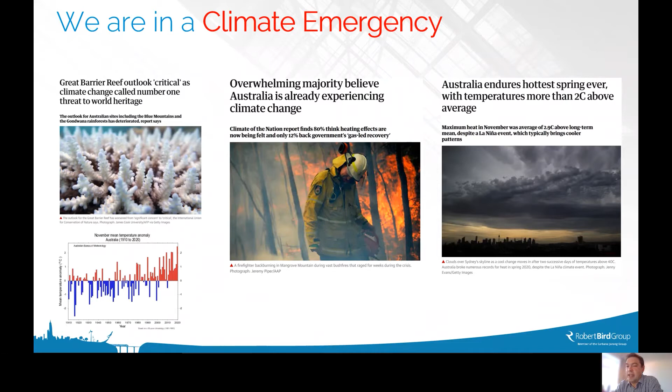So it is a very serious topic for us globally as a population, and this is coming on - global leaders are meeting at the moment to talk more about climate change. So it's obviously very relevant worldwide. The last 4 years have been the hottest on record, and I think the UN Secretary General put it: we're currently losing the race against climate change.

But it is one that we can turn around. There's a lot of discussion where the younger generations and our children are challenging us, putting the current working population on the spot to solve this, because unless we make significant inroads into solving the problems, it's too late for them to solve it. So it's not something we can leave for them to deal with - we have to act now, really.

So what impact do we have on it? We all work in the built environment, so where do we come in the overall context of climate change? The World Green Building Council has a strategy document, and some key points they pull out are: buildings are responsible for around 40% of energy-related global carbon emissions, and also 50% of global material use. And that's only going to go up in terms of the quantities needed.

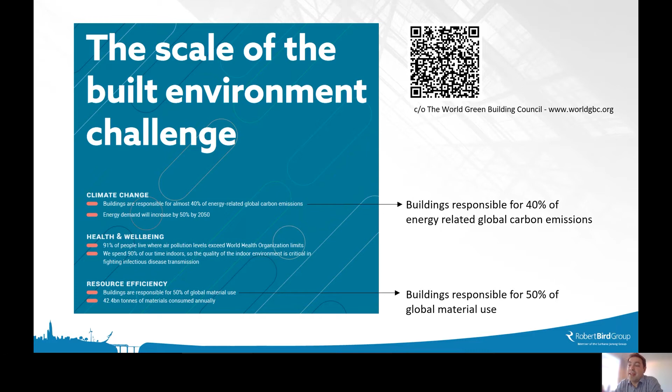The global population is growing - I think it's going to achieve something around 9 billion by 2050. And in this country we have housing issues where we don't have enough housing for people now, let alone in the future as the population grows. So it's a problem that's only going to increase unless we do something fundamentally different. The built environment as an industry has a big part to play in that.

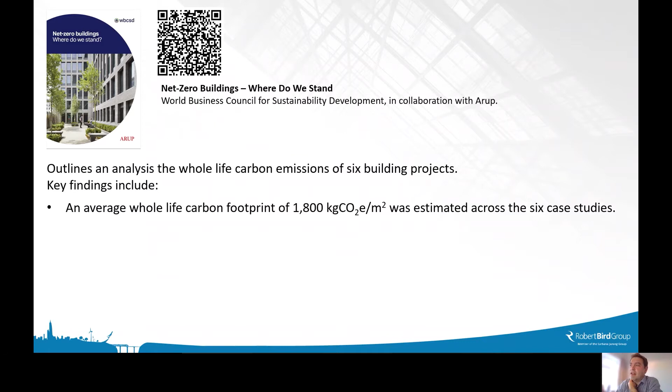There's a good report produced by the World Business Council for Sustainable Development, in collaboration with Arup, which tried to drill down into what it actually means as we construct buildings. They did a case study on 6 different kinds of building projects. The key findings were that an average building across the 6 had about 1,800 kilograms of whole life carbon footprint of CO2. 50% of that came from the front end - the embodied carbon during construction and design, the output of design.

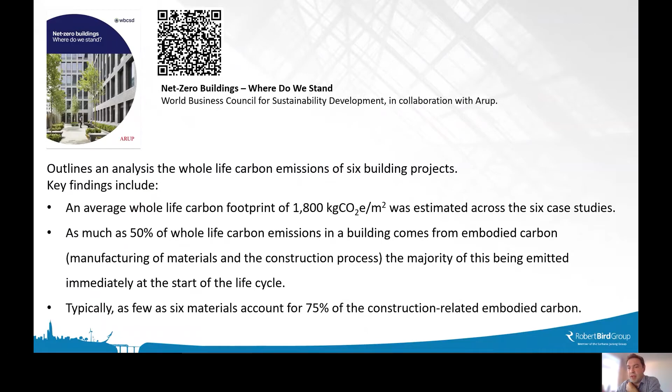That was fundamentally provided by 6 materials. So 50% of that whole carbon emissions is coming from concrete, steel, reinforcing steel, aluminium, glass, and the raised access floor, which was an interesting one. As a structural engineer, 3 of those items on that list are part of my discipline. So it's something that structural consultants and designers need to step up and really take hold of, to try and address those issues.

The report also starts to ask questions around whether we approach design properly. Should we actually be approaching it in a slightly reverse way than we do at the moment, where we first look at do we need to build anything at all? Is there something we could repurpose from existing facilities? Can you build less, or build in better, more efficient ways? At the bottom of that is minimizing waste - whereas design at the moment usually starts the other way around, trying to minimize wastage in design.

It's definitely a challenge for us to rework the way we think about design. There are also targets coming out from these publications, which have been talked about a lot industry wide. By 2030, we're aiming for 100% of new buildings to be net zero carbon operational, and reducing embodied carbon by 40% from where we are now. And then by 2050, all of those - both operational and embodied - to be net zero.

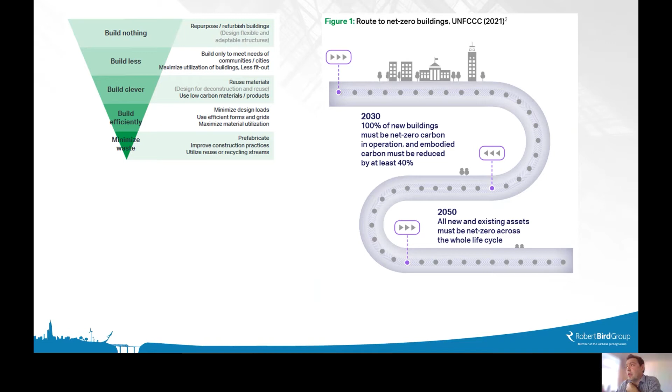Some more tangible targets. The RIBA is currently saying we should be targeting 1,100 kilograms of CO2 business as usual, but with a target of 500 by 2030.

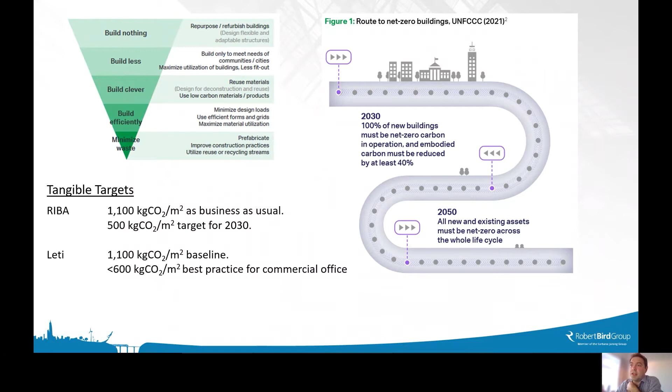LETI's baseline is also 1,100, but getting to less than 600 for commercial office. The GLA is targeting 950 and 1,400 for whole life respectively, with aspirational targets of around 500 and 850.

Compare those to the previous slide where we had those six case studies and the average was 1,800. It's clear that our standard design and construction processes aren't going to be good enough at the moment to hit those targets, so we need to start doing something different.

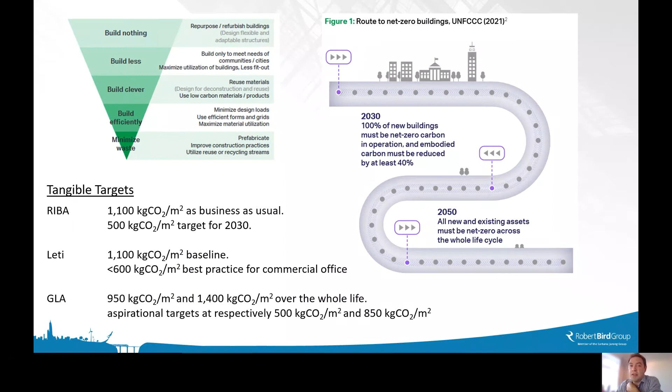I think the whole life building cycle—a lot of people have seen this before in various presentations—is really about looking at where you address carbon. You've got the product stage up front, which is primarily design, where you're specifying the materials to be built.

Then there's construction, which primarily consists of transport to site and the actual erection of the building itself. Then the use stage, which operational energy comes into quite significantly, and then end of life—what do you do with the asset at the end of its life? Beyond that is the circular economy: can you reuse anything from the building and plug it back in at the other end, in the product stage.

For context, 50% of carbon comes from that front end—the product stage and construction stage. So if we wanted to target where we could make a positive impact, there's a lot we can do around that front end. There's something around 43% in the use stage and operational energy, and the rest is across end of life.

It's interesting—if you talk to MEP consultants, they've been on this journey a lot longer than us structural engineers and architects. I think we're about 15 to 20 years behind in terms of driving that 50% of initial embodied carbon down. The MEP industry has been doing that; they're driving towards operational net zero a lot faster than we have. So there's quite a bit of catching up we need to do on the front end design.

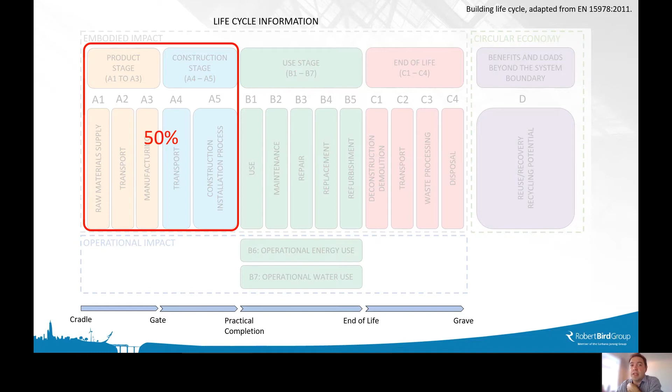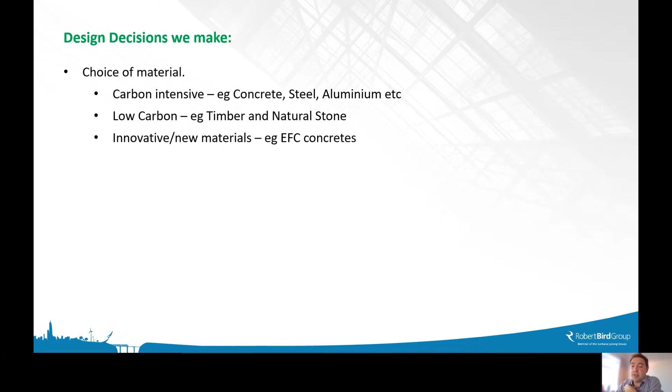So what really impacts this, what decisions can we make to drive that 50% down? Obviously choice of material—looking at what kind of materials we're using, whether they're carbon intensive or low carbon, and whether there are any new materials starting to come to light. Then quantities—can we more efficiently optimize designs, are there loading opportunities, are the loads right, for instance—and then appropriate use of material, waste, and DFMA as well, which is becoming about whether we can actually build and design things off site and then bring them on.

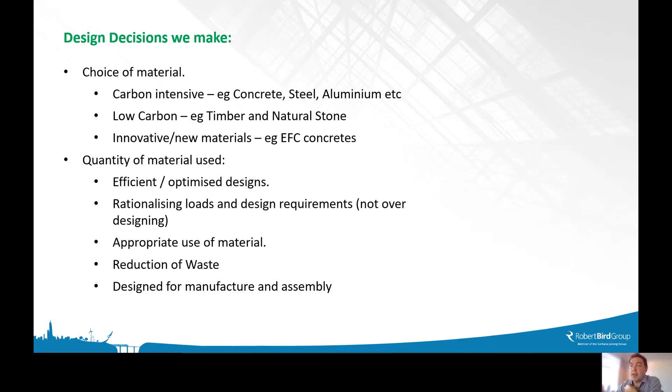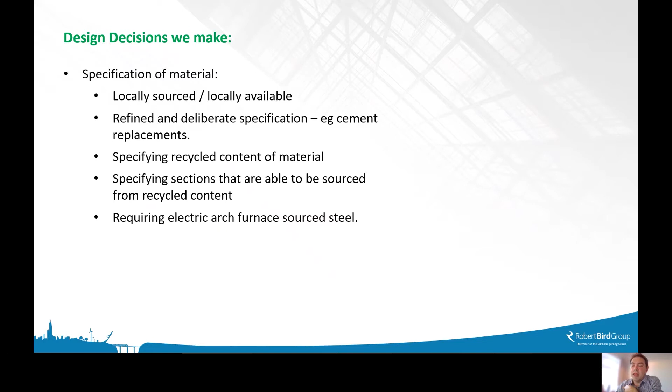Specifications—things like locally sourced materials—can we start to look at what our specifications are? Do we need to put more onus on the supply chain to drive different manufacturing techniques in order to reduce embodied carbon, and look more at off-site manufacture to reduce waste. So that's kind of where we are.

So if we think about how digital and data can help with those things—how can we actually leverage the technology that's become more prominent over the last decade, and turn that to use in anger to try and help us solve some of these problems?

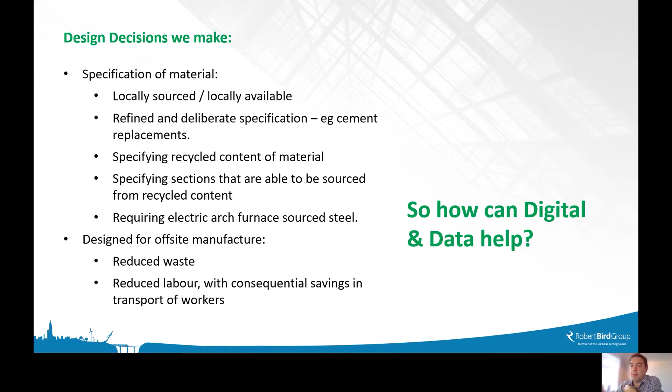Just a brief pause on what I mean when I talk about digital design and engineering. Primarily when we talk about digital design at the moment, we talk about parametric modeling—form finding, setting ourselves constraints and operating within those constraints. Basically it's a bit of 'what does the computer say' after it's done a huge number of iterations to try and solve a problem that previously may have taken us months to solve, that we can plug into software to answer the question for us, or at least give an indication of what the answer might be.

Interoperability, so all our software packages that we use across the industry are starting to talk to each other. Certain ones don't still, but there's a lot of pressure on them to start opening up the back end and allowing user interface into the system so that we can start to plug and play all the different software packages together.

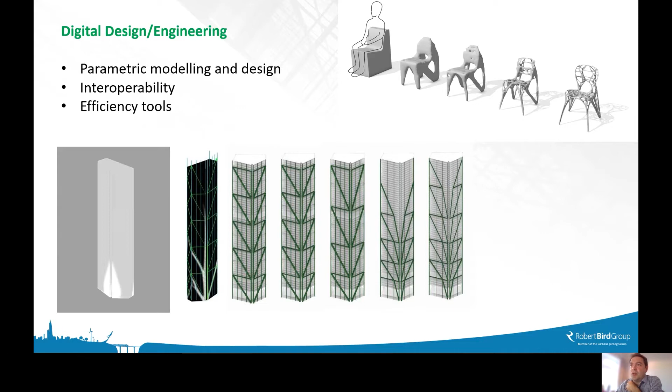Efficiency tools, trying to find efficiency in structures and in forms and just in the way that we work. And visualization tools as well, so augmented reality, virtual reality, and mixed reality. How can we actually start to visualize what we're building before we build it, and use that to make some decisions.

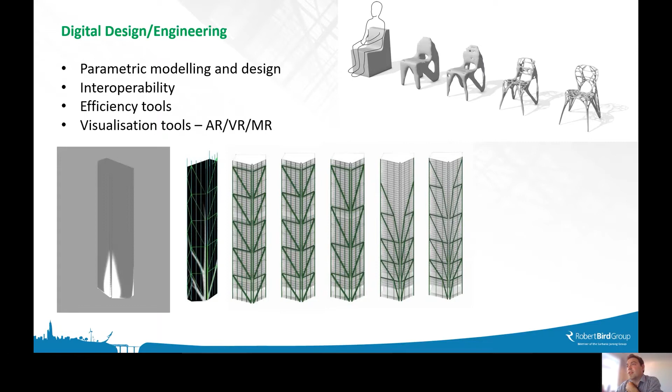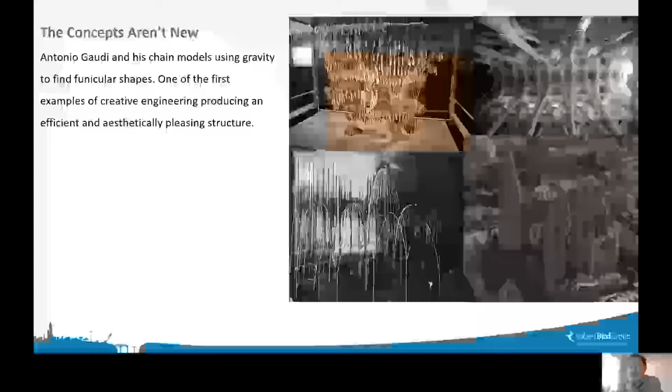None of these concepts are new. We've been doing this for a very long time as engineers. Antonio Gaudi used to do it with chains, and that was probably the first time where anybody was really trying to drive efficiency in structures and reduce material wastage. He did it on the Sagrada Familia with a hanging chain system, by hanging sandbags off chains, and that finds the most optimal form of the structure. And what you then do is if you flip that upside down, everything's then in pure compression.

So there's no bending in anything, which makes it very, very efficient. And he was doing that sort of physically with physical models. The amount of computational power we've got now means that we should be turning those kind of tools in anger on every single project we do to try and find efficiency where we can.

Data science is the other one, which I think fits quite nicely into trying to drive towards more sustainable outcomes. That's really data mining and visualization. We produce a huge amount of data now when we design and deliver documentation. So there's a lot of information there which we can use, and we can use it all throughout the design process as well. And then off the back of that, what do we do with that data?

There's a lot of technology being developed now around artificial intelligence, helping us to identify trends, machine learning, which then comes on to actually, if you start to data mine a number of projects, you can start to identify benchmarks and best practice and then start to triage current projects against that. And then into deep learning, which is getting really into sort of almost being designed for you, to try and find the optimal outcomes for you.

So those are the kind of technologies that we've got at our disposal at the moment, and there's many, many more. I'm just kind of touching the surface of them in this. You could probably talk for hours about each individual one, and there's all kinds of subsets of those as well.

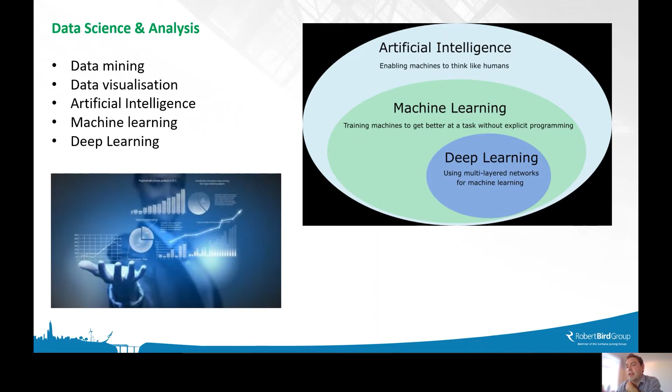But those are the kind of technologies that we have, and so then we look at where do those things start to add value, where can we actually turn the technology to try and drive down that 50% of embodied carbon in the design. So I'm pretty much going to talk primarily about where I see the opportunities in the product and construction stage.

There will be ample opportunity to turn these in anger in the use stage and end of life. But again, there's a huge amount we could talk about on this, so I'm going to try and concentrate a little bit on some case studies and opportunities that I can see around the design and construction points.

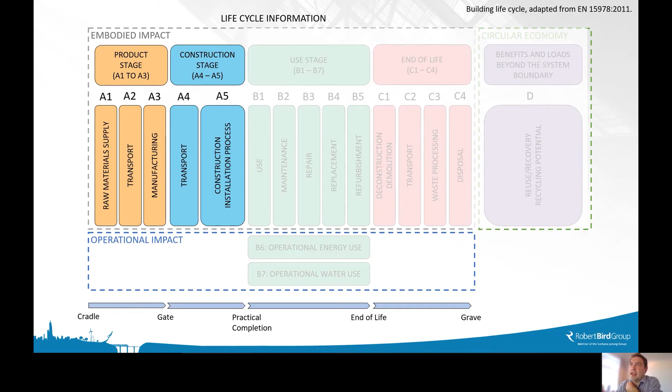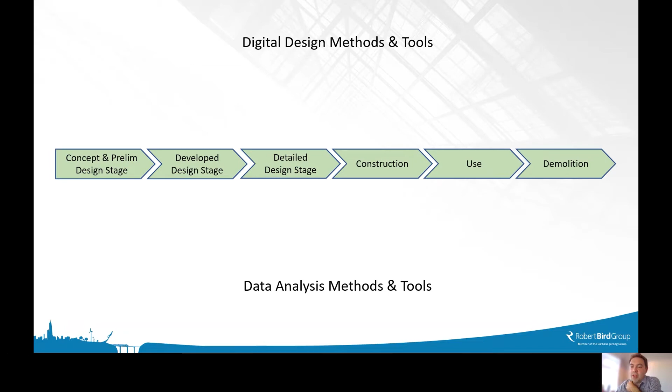So if you think about a standard project as we go through, in terms of the timeline of the activities that we do from start to finish, during the concept, there's a lot of opportunity to look around whether we can refurb and reuse. Can we use digital tools to develop concepts, looking at geometric layouts, looking at form finding and materiality as well. There's opportunities we can take to rapidly flick through different materials and look at the outcomes of each one, so that we can make better decisions about where do we want to go with the building.

And we also start to bring data together, so we're starting to look at feasibility data.

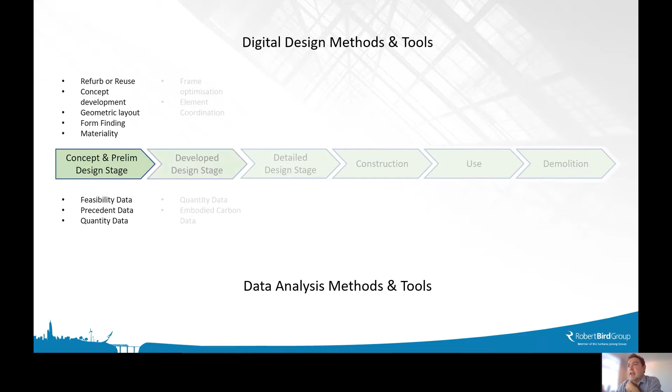So again, that's pulling out things like GIA, NIA versus material quantities and carbon quantities. We can start to pull in precedent data, looking at information that's come from previous projects and comparing those against the aspirations we've got for that particular project, then starting to form our concept from an informed point of view. As we go into develop design, we're looking at frame optimization, element coordination, and more quantity data and embodied carbon data. We're starting to pull out more information through those stages.

Into detailed design, we're continuing to optimize elements, and then starting to push documentation out and look at construction sequencing, and whether we can optimize the construction sequence to reduce the amount of time we're spending on site. There's operational energy from running a site, and if we can reduce the construction program, we can start to save on those operational energies as well.

We also start to pull out more data. So again, we're now pulling out embodied carbon data, and also machine learning data, where you start to pull information at the detailed design stage, before construction, which you can then plug back into the next concept and next prelim.

Through construction, there's monitoring of site data and all that kind of stuff we can begin to pull, and also looking at monitoring the construction against the design. So are we achieving what we set out to in design in terms of material quantities? In use as well, there's usage data.

And then into demolition, looking at opportunities for recycling and material quantities, and whether or not we can dispose and reuse. So those are the kind of areas throughout the project where we can use our digital technology to try and drive a better outcome.

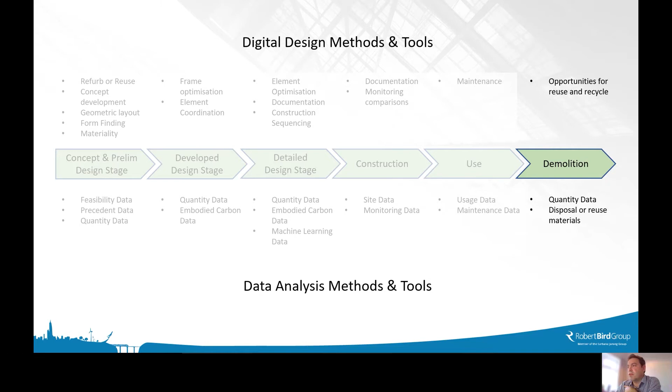So if we start to think about what that means practically, because obviously those are very high level, what are the actual opportunities that we can find?

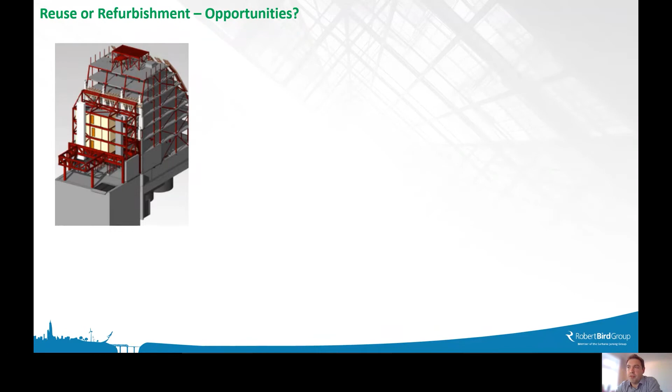Very early on, if we're looking at a site, looking at reusing assets, we often make the decisions. Is there opportunities to refurbish the buildings? Could we look at facade retention, or could we look at extending up and just adding more stories? One of the real questions that gets asked, assuming you're not trying to build a 200 story tower on a site which has got a building that's only 6 stories, because obviously then you're straight away looking at demolishing and rebuilding.

But if you do have an asset, the question is, could you be reusing it? Could you extend it upwards? There's a lot of buildings across London in particular which have space to extend, and there's definitely capacity in the structure. The question then comes to, what might it look like if you did go up?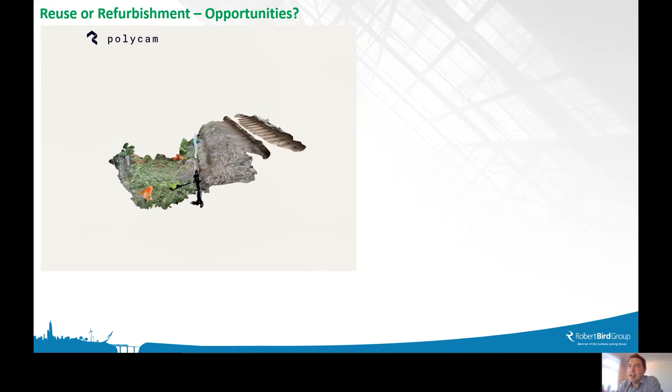But the technology is shrinking. Whereas previously you would have had to have hired professional firms to go in and do that, you can now start to get a really high level scan of actually what's there.

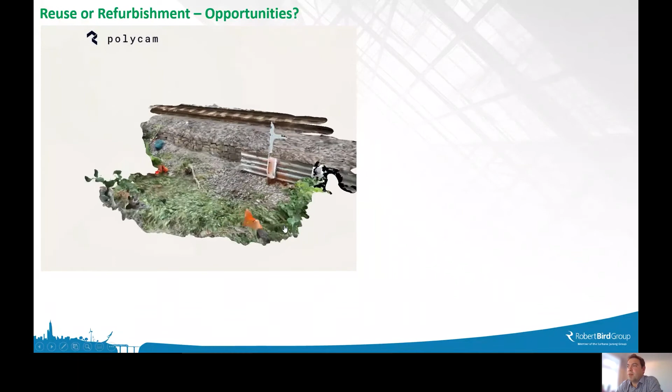So if we put that into buildings, you can start to look at what's there in terms of the building, where are the column layouts, and then you can start to build indicative models and very rapidly pull out what is the opportunity to go up on a building. Using Revit and other various digital tools, you can start to really rapidly get an idea of what the massing might look like. You can look at what grids might be suitable for different uses, and it starts to give you an idea of what the opportunity could be to refurb and reuse before you get to the point of demolition.

So that scanning technology is becoming much cheaper and much easier to use, and there's those kind of opportunities which we can take hold of. Definitely, personally, I'm quite interested in the LiDAR.

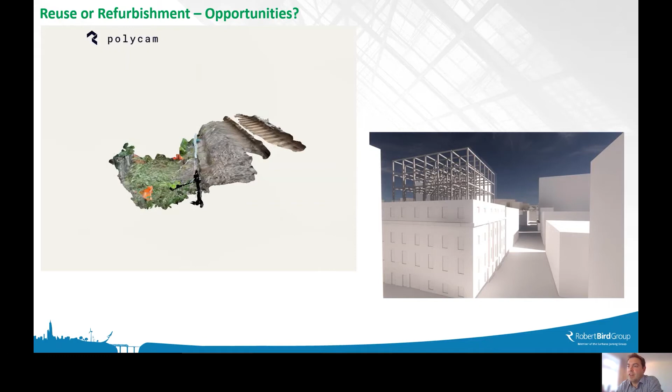We've only just really started playing with it recently, but the LiDAR scanner in your pocket to me seems like a great opportunity for us to be able to realize refurb opportunities in buildings really very rapidly, to look at the opportunity for them.

One of the biggest tools that we've got, and I mentioned before, is parametric design, and that enables us to really set targets for what we're trying to achieve.

So any kind of parametric problem exists around 3 things. One is the things that you can vary. So what in your design, what is a variable parameter - for instance, building height, the grid spacing, your floor to floors, materials - anything like that could be a variable that you can alter as part of the design.

You set your constraints. So your constraints, obviously, you may have a maximum height of the building. You may have in-ground constraints where you can't actually put any structure down.

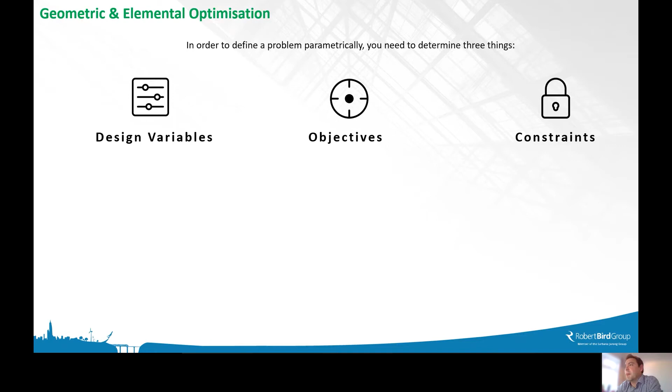And then what your objectives are. That's really where the opportunity exists for us trying to drive towards better sustainable outcomes - we need to think about what the objectives are in our design. Are we driving to minimize wastage on site? Do we want to make ultra efficient structures? But if we do that, are they going to need a significant number of temporary works to construct them? So we need to start thinking about what objectives we want to set.

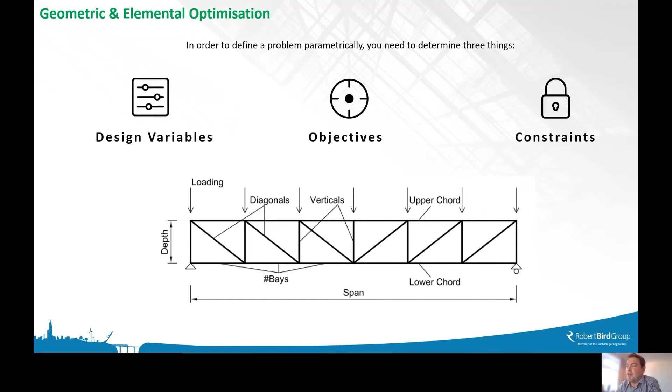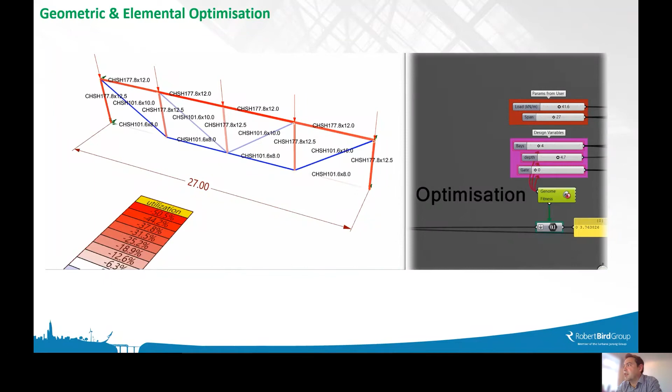Very simply, to put it in some context, if we do a simple truss, you've got a huge number of variables in a truss, but you can then start to vary all those things, and building in equations and algorithms can almost give you a live feed out of actually what the structure needs to be as you vary things like truss depth and height, and you can start to try and optimize designs. This is only a simple truss, but if you do that on a much more site-wide scale, you can start to identify much better opportunities.

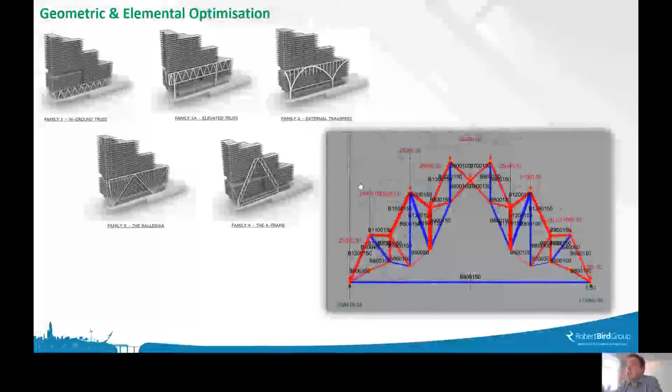Also, parametric design enables you to rapidly go through different options. So you can start to very quickly go through and alter options depending on what your parameters are. And then once you've honed in on a rough concept, you can put that into genetic algorithms, which then, within a series of constraints - so if you lock things to grid - will start to give you the most efficient structural system or structural solution you've got to whatever problem that you set it.

And that's really starting to drive down material usage as well. You're trying to find, and reduce as much as you can, the quantity of material that you're trying to construct with.

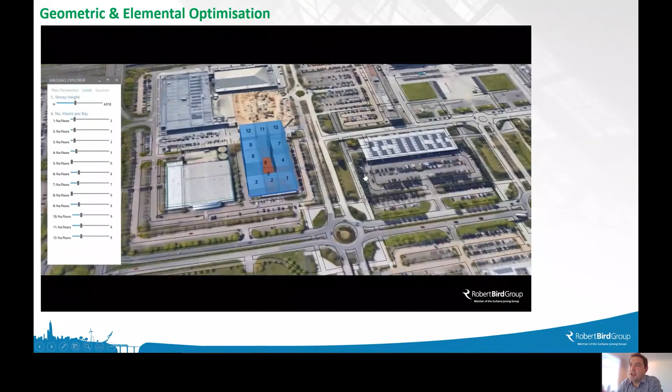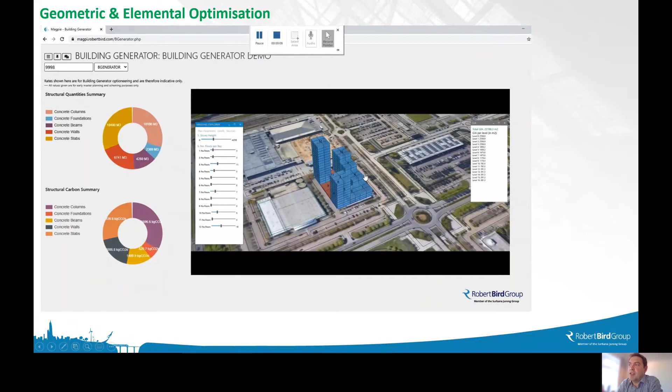And you can put that all together - if you start to look at a site in itself, and I know you guys had Prism presented to you a while ago, which is again looking at site opportunities - but quite rapidly you can start to say, if I was going to take any site and look at the opportunity on that particular site, you can actually play around and pull out material quantities, looking at different arrangements of the building and pulling together carbon quantities and everything else, and it enables you to make decisions about what you can do and what the site opportunity might be much more easily, and making informed decisions as well. So you've got some kind of idealized conceptual design straight off.

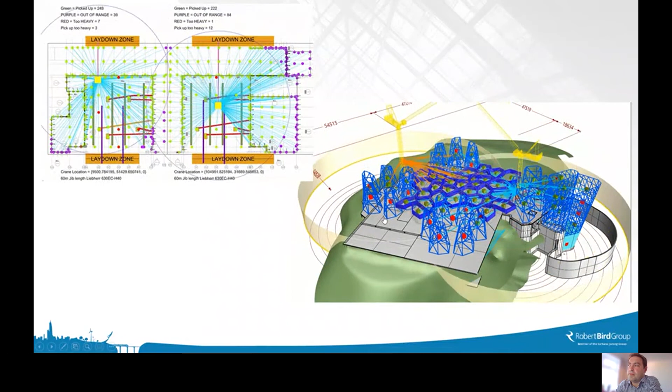And it goes on to crane optimization as well. So there's opportunities around looking at the construction sites themselves, and again this is all on parametric design - depending on what your parameters are, what are your constraints and what are your variables. If you start to look at a site in itself, how can you try and work out where the best positions for your cranes and everything else are across the site. Again, this is down to trying to reduce construction program in order to reduce time on site, because that's reducing our impact of the construction phase itself.

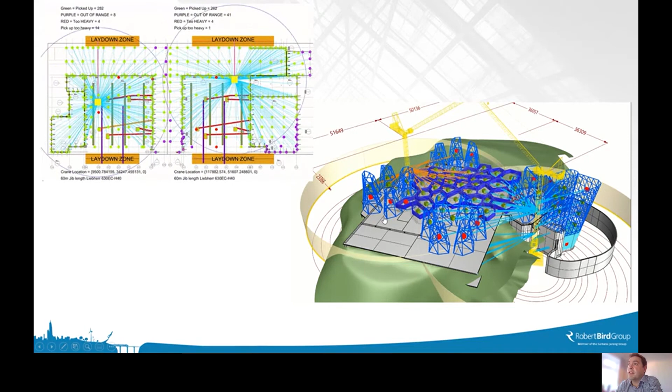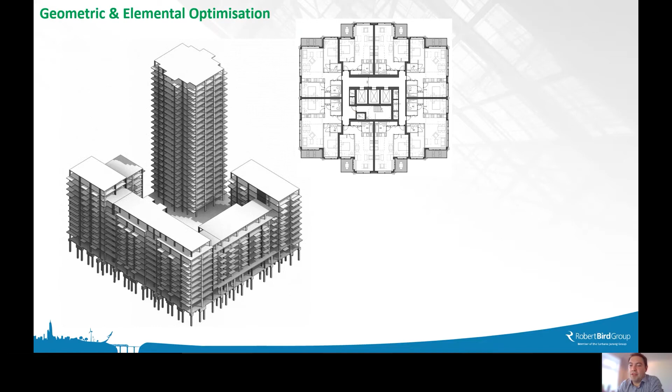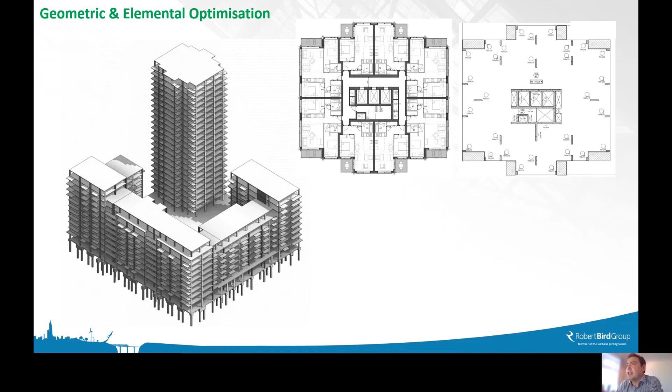One of the things I've often thought about is parametric design, which many of you have seen used in industry magazines to realize complex geometry for interesting and complex buildings. One of the biggest missed opportunities in my view is that we're not really using it on your bog standard residential building, which we build a lot of. These are fairly standard reinforced concrete buildings, and from a structural point of view, we take an architectural layout and, based on experience, come up with a column layout on a rough grid that gives us a workable flat slab or PT solution. That's kind of where we stop. There's some minor tweaking for coordination, but there are actually better opportunities in there which we're not realizing yet.

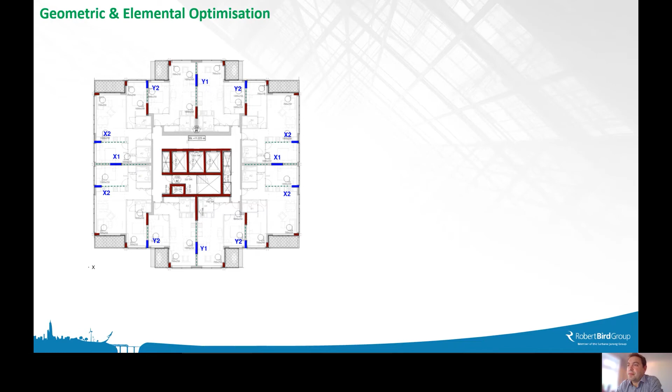If we think about that floor plan in more detail, all of those columns can move within a partition wall. But trying to identify the best arrangement of all those columns in order to minimize slab thickness and reinforcement would take a person a very long time to do as a design exercise. Whereas if you use digital algorithms to do that for you, you can run hundreds and thousands of different iterations, moving all those columns 100 millimeters at a time to try and minimize the slab reinforcement.

Running this through, this is where you set your target. So if you set your target to minimize stress in the slab, it'll find you the most optimal outcome for those column layouts to minimize whatever target you set.

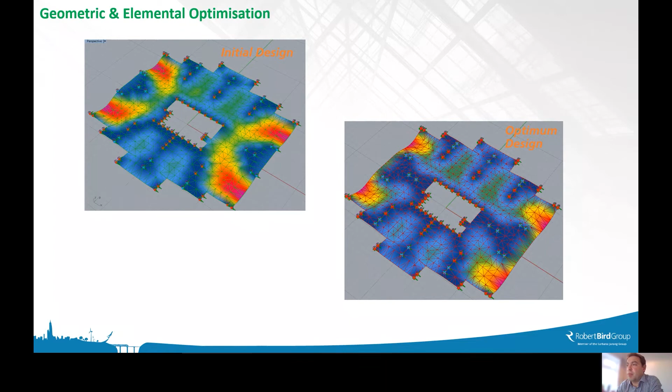This is just a quick example on a residential building. By letting the computer find the answer, we came up with a different result. If you look at the initial design, you've got quite highly stressed bays. That stress gets reduced in the optimal design, saving 7% of reinforcement. More importantly, it's saving a 15% reduction on the edge deflections, which makes your facade jointing much easier. So it's not just the structural impacts, it actually benefits other disciplines and other materials as well.

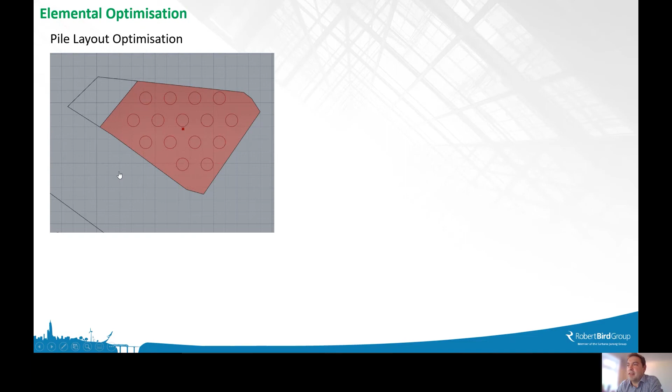You can also run that through elemental optimization, looking at whether you can minimize the number of piles you put in by varying different sizes. If anybody's interested, there's quite an interesting paper written on this.

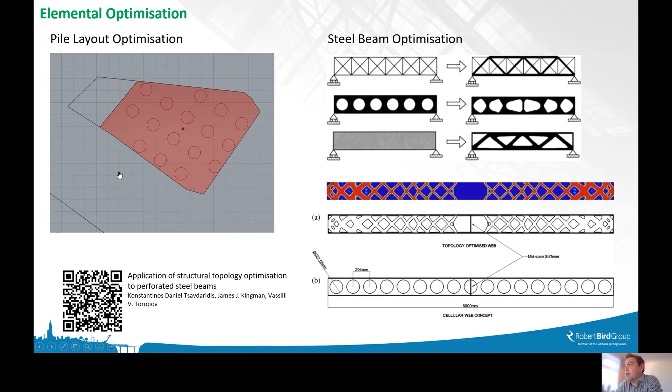Topology optimization of beams: if we look at a steel beam at the moment, we put circular holes in to allow for service penetrations. But actually quite a lot of a steel beam, and especially a concrete beam, is wasted material from what it actually needs to be. A fully optimized beam looks like that. I think the fabrication of that is probably going to require more embodied carbon than you actually save in the wastage. But maybe one day we are going to go towards that, where we start to 3D print materials and fully optimize them. From an MEP point of view we'd obviously have to coordinate that, but there are opportunities out there to use the technology we've got to try and reduce the materials we have in our buildings, if we can.

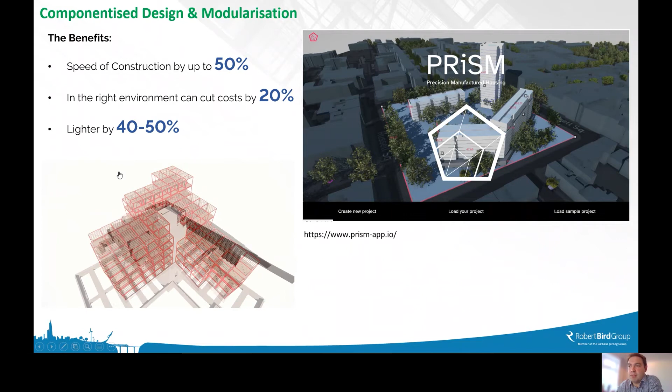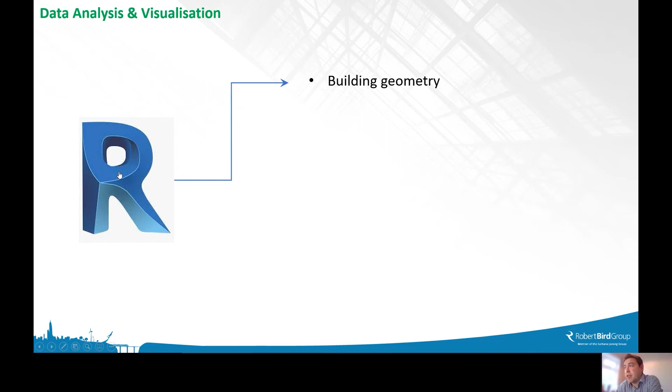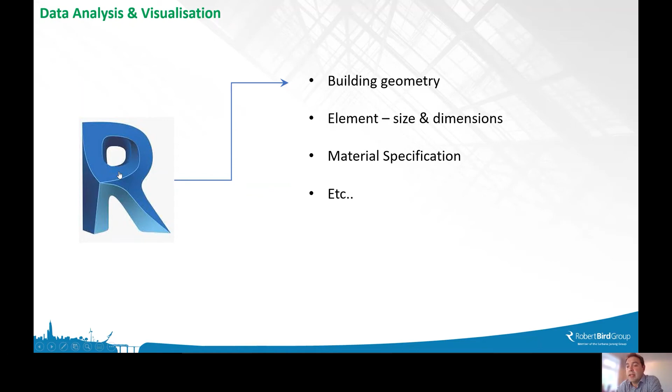So those are a couple of brief overview opportunities around the design side. The data analysis is a great opportunity as well. We all design and document in Revit at the moment, and there's a huge amount of data in there. We keep our building geometry, element sizes and dimensions, material specifications, all kinds of information that goes into the Revit model now, and we can start to withdraw that information and start to use it.

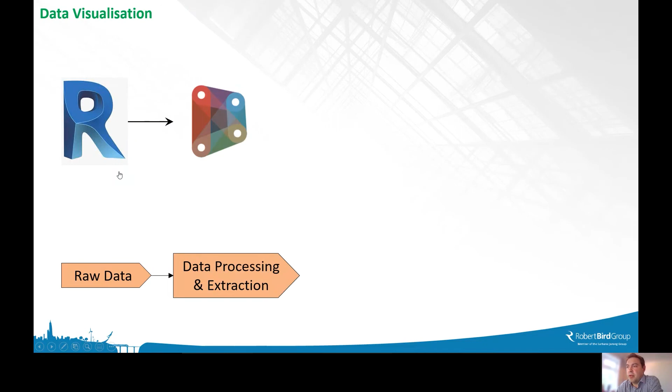So what's in Revit is in effect the raw data, but using Dynamo, you can start to pull that out and extract that data, and then push it into databases. You can use Excel or SQL databases, and then start to pull all that information together using - this is just an example of a workflow that is hopefully reasonably accessible.

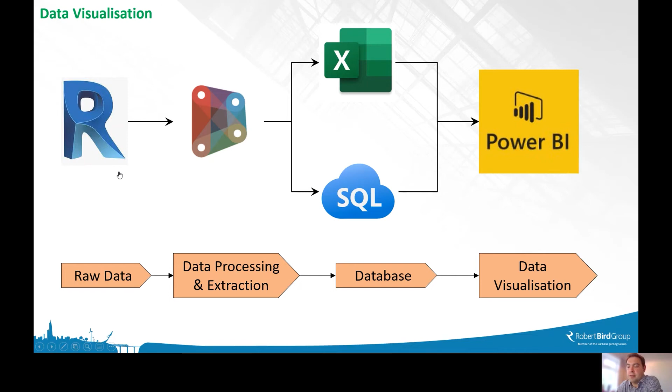If nobody's tried Power BI, it's a great tool, and is fairly easy to get your head around for visualization of data. It enables you to cut and carve data to show it in all manner of different ways that you can start to use it to make informed decisions. You can start to pull out things like full quantities across different materials in the building.

And then fairly quickly turn that into embodied carbon, so you can actually start to see where your embodied carbon is in the building - where it's coming from in terms of foundations, concrete frame, steel frame, facade, other bits and pieces.

I suppose the analogy is this: once they started to put the ingredients and the calories and everything like that on food, when we go food shopping, we all started to shop differently. I don't know about you, but certainly I tend to, especially with cereals, look at the sugar content in cereals now before buying them.

If we start to actually be able to see the embodied carbon in all of our designs, are we going to start designing differently? I would suggest we probably are. Once we get hold of that data, it's there and it's in our faces, and we need to start to address it and actually look at whether we can minimize it by making better decisions around things like material specifications and other things.

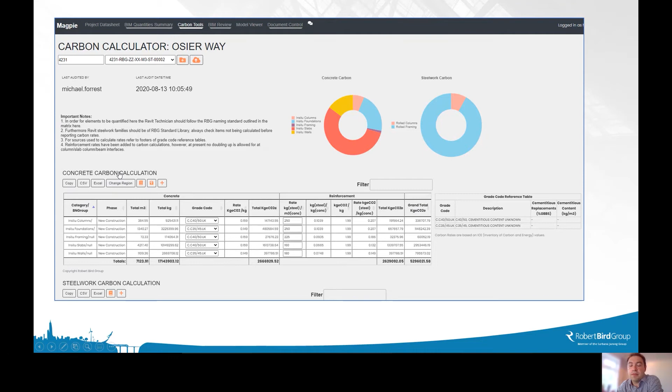We can also start to look at those things over time - how the design progresses and whether or not you're making any decisions, because you may be making design decisions for one reason, but actually they're having a negative impact on your material quantities or anything else. So the more data we've got and the more we can visualize it, the better, because then we can really dig into why we're making design decisions and what the cost benefit of some things are.

I don't think we're under any illusions that there is a cost associated with going for some of the low carbon options, but if we can see that data and it's there in front of us - at a cost of X versus a carbon reduction of Y - we can actually have an informed discussion as a team and make a better decision. This also means that we can start to test each other as well.

One of the things that I think as an industry we should be doing is peer reviewing each other - we peer review each other from a technical point of view, but we don't peer review each other from an embodied carbon point of view. We tend to raise questions around technical performance of the building and those sorts of things.

But very rarely, when I have a peer review that comes from another firm, do I get a question about whether there's a better way to do this from an embodied carbon point of view. I think we all need to acknowledge that we need to change that. Certainly I'd be more than happy to be challenged on that if another firm thought that we weren't making the right decision somewhere. I think it's a valid discussion to be having amongst the technical discussions that we also have.

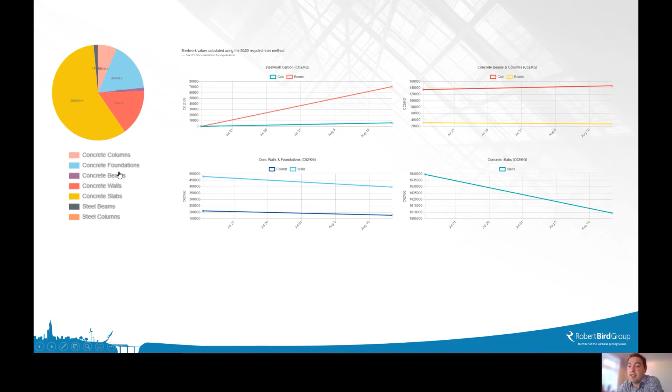Another thing, what do we do with the data off the back of all of this? So once we finish the building, Madaster is an initiative, a company that I came across quite recently, which is a Dutch company building a library of buildings.

The idea behind it is sort of a Lego library, but the concept is that when you've built your building, you submit your models and 3D information to the library, and that's then locked until you may not want to lock it anymore. So you may be demolishing the building, and you actually want to open up the building to others to look at.

My understanding of the concept is that, say you're building a new facility or a new asset somewhere, you can look at any buildings coming to their end of life, and rather than procure your material from raw material and buying it straight from fabricators, you could start designing based on material coming from another building. You could buy your steel beams and columns from a building coming down, because as part of that 3D data you know how long all those elements are, even down to the connection details.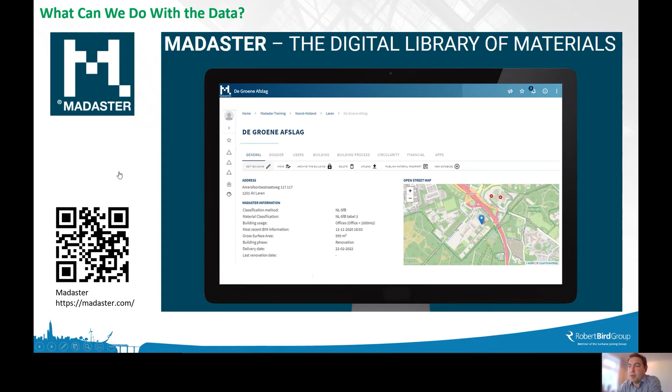So just to finish off on that, where are there any barriers and opportunities? The way I view this is that a barrier presents us with the need to come up with an opportunity to get around it, if you like, a way to do things differently.

Construction phase data - at the moment we calculate our embodied carbon in the construction stage usually prorated, so as a whole life it's done as roughly 1400 kg per 100k capex. If you drill down into that, you can target wastage, but it's all done on a per capex or per quantity basis. So there's not a huge amount of accuracy in the data we're getting from construction sites at the moment.

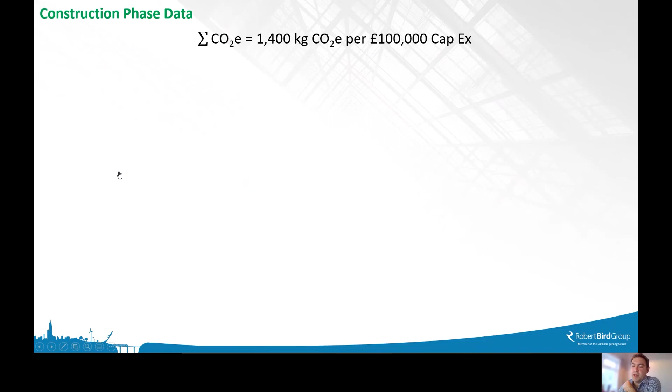Temporary works, for instance, is one example. That temporary works tonnage is often wrapped up in that 1400, but if you've put more steel into your permanent works to mean you don't need as much temporary works in order to reduce the program, you're almost double counting it - you're counting it in the permanent works tonnage embodied carbon, and then double counting it in the bundled up construction embodied carbon. So there's obviously work we can do across the industry, trying to identify temporary works, get them modelled and put into BIM models so we can quantify them as well.

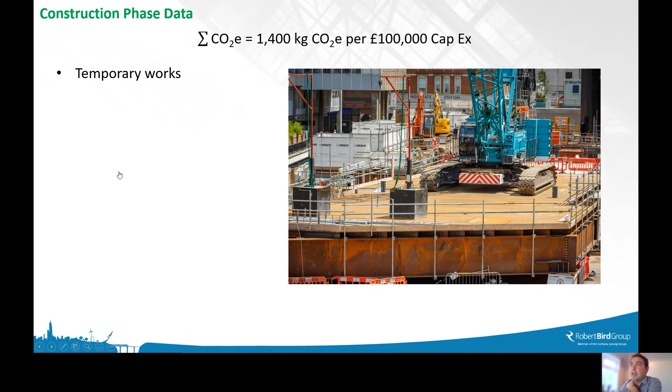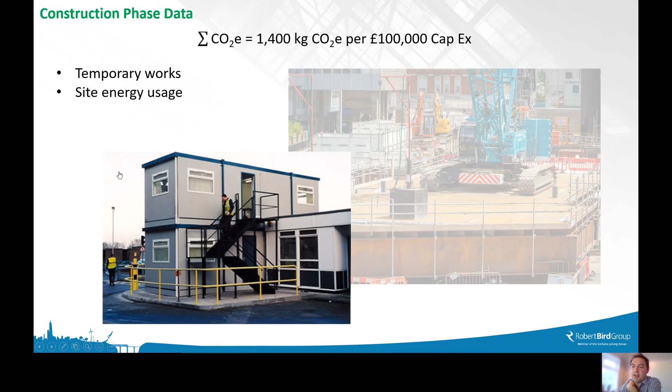Site energy usage - collecting data is going to be important to try and understand, for a site of any particular size, what its actual operational site use is. Material tracking and wastage - understanding materials as they come onto site and as they go off site, tracking materials and looking at where our wastage comes from. The amount of wood we go through on construction sites is quite significant, for formwork and other things, so anything we can do to reduce that load on timber, ply and 2x4s would be a good thing. But we need to understand where the wastage comes from first.

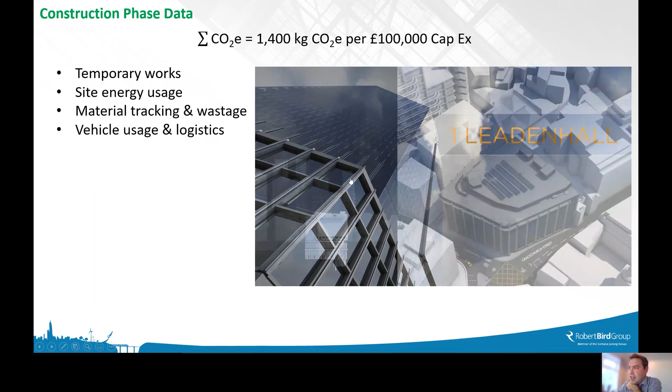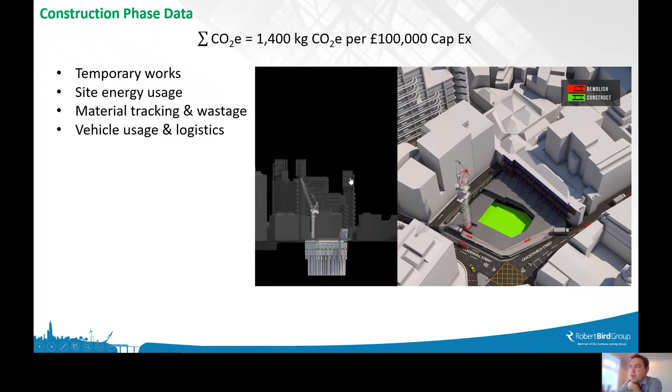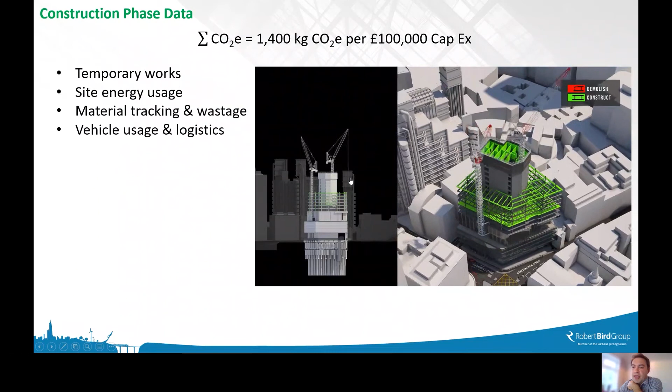And then vehicle usage and logistics - I'm not going to go through this in detail, but VDC, virtual design and construction, is enabling us to do a digital run through of the construction to try and identify any pinch points. The more we do that, the more that technology gets adopted across different projects, it's going to help us prevent delays on site, and the quicker we can get on and off site, the better - because we're reducing the actual embodied carbon from the site as well.

We design all offices for this very high loading, and that's code driven. While individual floor plates could be overloaded, and we do need to design for that, the foundations, once you track all that load down, even with live load reduction, are designed for a significant number of people. For context, one project in our office is designed for an occupancy of around 8,000 people, but the foundations could support 125,000 people in the building.

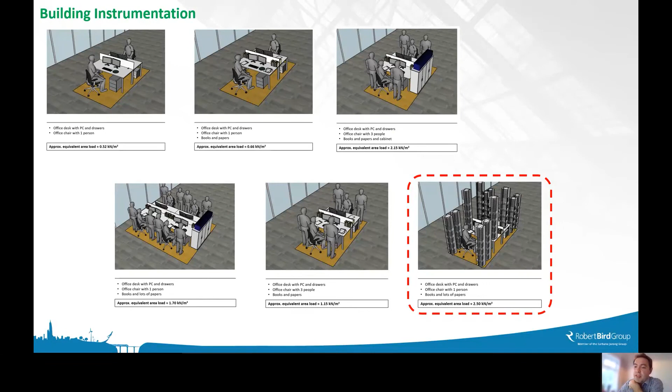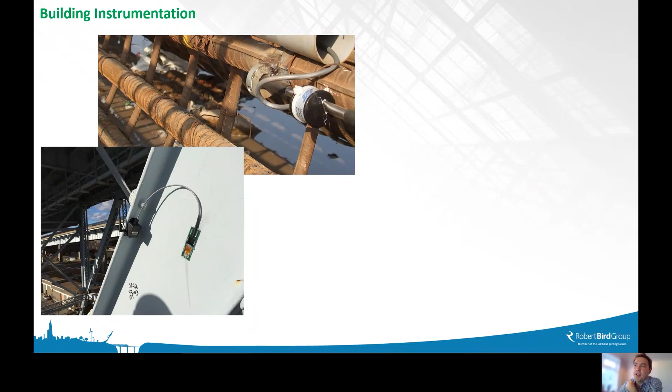But we can't challenge that at the moment because we don't have the data. Whereas if we start instrumenting buildings and understand what the actual loading is, we can pull out information and have informed discussions around codes and standards, asking whether we need to rethink design requirements. While it's appropriate to design a floor plate for high loads since they could occur anywhere, should we think more about how you track that load down to the foundations and how decisions are made around that? That's one thing we need data for.

We also need to start thinking about whether we can instrument buildings we're building now, to inform those discussions in 5 or 10 years' time.

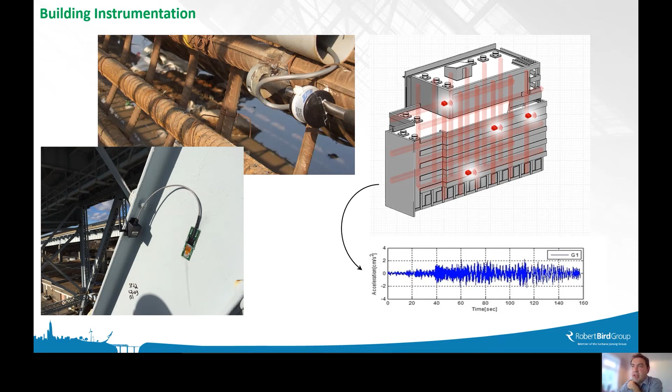Industry skills is another one, and it's a shame we can't meet in person, because I'd be very interested to talk more with people about how they view the industry skill set.

McKinsey published an interesting article a month or two ago trying to identify the skills for the future, to make sure people have the necessary skills for the future world of work. One of their four foundational skills was digital, which includes digital fluency, software use, and understanding of digital systems.

So I think we need to start thinking about non-traditional entry points into our professions. I was talking to a computational engineer who actually started as a biomedical engineer looking at bone structures — not a traditional way into structural engineering, but he has a huge amount to give in terms of understanding how you optimize structures, because bone is a very optimized structure within a body and it grows according to its loading.

So I think we need to think about how we're recruiting staff. Are we bringing in non-traditional skill sets into the construction industry to help us meet the challenges in front of us? And also challenging the norm, really.

There are digital practitioners, the people who operate the tools and can code. I can't code — I can do a bit of it, but that doesn't necessarily mean I don't have a place in this. What we're trying to drive at the moment, and what I'm trying to look at in our organisation, is getting people away from thinking that because they can't code or use the tools, they're not part of this digital revolution and have nothing to contribute.

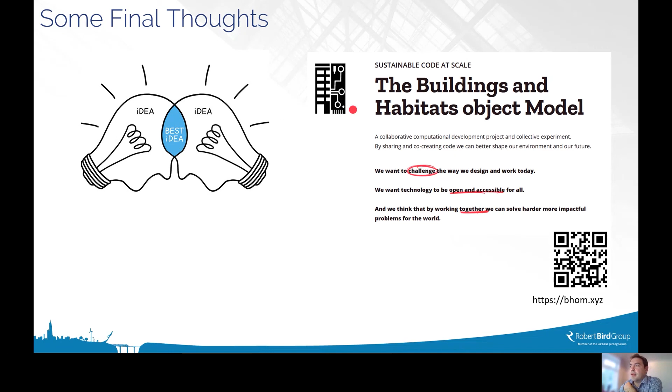And that is me. Thank you.

Well done, sir. Well done, Alex. That was brilliant, mate, really very, very good. Highly enjoyable, extraordinarily informative. And your time is not bad at all there, mate. It's not bad at all.

Just saw a question from Stephen Page - well done, Stephen. I'll read it out so you can think about what he's actually asking. It's interesting to see how parametric design impacts MEP. A design could be optimized for structures, but a reduction in concrete could reduce thermal mass and therefore increase the building cooling demand, for example. So there definitely needs to be a balance. Thoughts, feelings, observations on a very highly articulated observation.

Yeah, and as I mentioned, the beauty of parametric design is you can set your targets to be what you want them to be, and the most optimal structural solution is not always, and probably is unlikely to be, the best all-project option. So, as you say, it needs to be taken in context with MEP, architecture, facade, everything else, and it comes down to what we set our parameters and targets to be.

And that's where I think it needs to be a collaborative discussion in the design teams about, as we try to optimize the design, what actually matters to other consultants. It's not something that as a structural consultant we should be doing in isolation. We should be involving the full design team in that so that we can strike that balance.